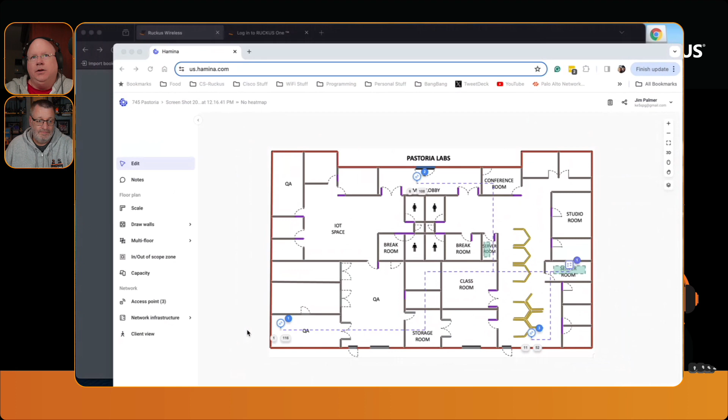And to clarify, it's less about being unwilling to use a certain measurement we think might be right. It's more about—you get a client or a customer or a project, you get a floor plan, but there's no measurements on it, no scale at the bottom corner, and nobody able to work with you at the local site. Amazingly, nobody has a tape measure or a ruler or any other way to say, hey, this office in the top left corner of the floor plan is an 8 by 10 office.

And that's really what it is. I've been doing this long enough, I'm sure you had the same—well, maybe not, because you came from a place where you were only working that facility. But we've all heard stories, we've all had experiences where you literally just get a floor plan with no numbers on it, nothing, and you're not local to that site, so it's hard to do the measurements. So what I will add is, in those instances, make sure to cover your own butt.

It goes back to garbage in, garbage out. If I have no measurements and nobody willing to give me one, take a yardstick, whatever, and just tell me point A to point B is 3 feet, or 10 feet, because that affects your margin of error. Unless you've got somebody do that, you put a caveat on that predictive design model saying this needs to be validated, because there were no hard measurements taken on site to confirm distances.

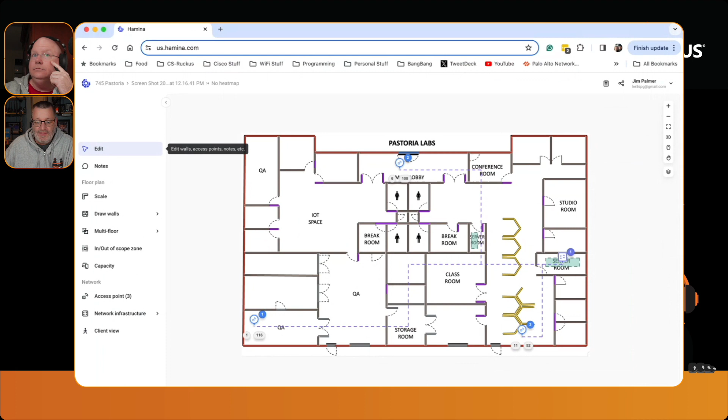Just as important, if not more important, than scale is the attenuation values. Going back to our planning tool, you can see different colors here - yellows, grays, browns, purples, red, silvers. Those are all different types of walls I've drawn in. I did this quickly to prove a point, so accuracy didn't matter here. When you do these crazy angles, it gets a little wonky if you don't zoom in close and take your time, so I was just kind of throwing them in.

It was more of a case of showing that when you do these crazy angles, it gets a little wonky if you don't zoom in really close and take your time.

More importantly, most design tools will have all these different material types - retail shelves, warehouse shelves, windows, tinted windows, wood. For the most part, you end up guessing at this, especially if you're not on site. However, you're not supposed to - this goes into that. This is actually much more critical.

Thanks, Christopher. Good old Simo - see, I told him he had to be on the show again. That doesn't count though, it doesn't count. So now we've unofficially had Simo and Sharon on.

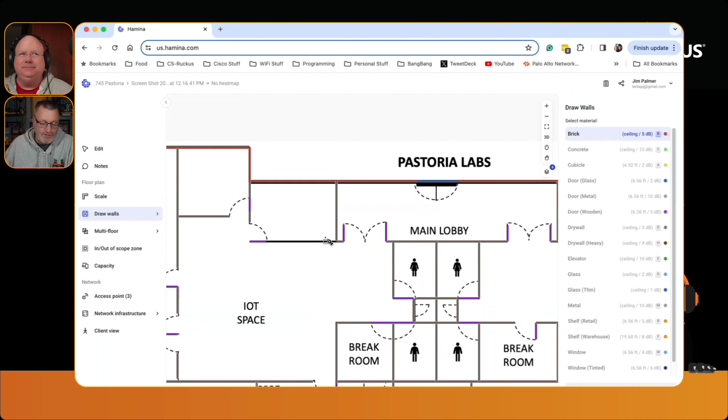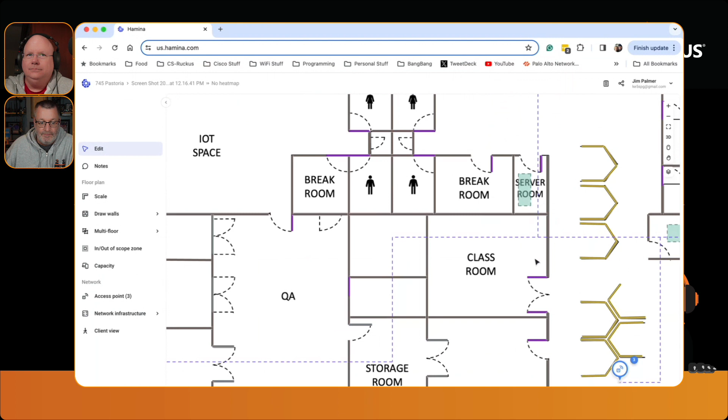There's actually ways you can go measure and find out exactly what the attenuation value of each one of these walls is, and don't guess. Too many times you find out this wall used to be an exterior wall, and it's actually brick that they just put sheetrock over top of. So now you have sheetrock, brick, and sheetrock, but you just draw it as sheetrock, and then it doesn't work, and you want to know why. Generally speaking, it's because for a design tool you probably put in the wrong attenuation values, whether that's for a wall or, in this particular tool, for these different server racks in server rooms.

You can actually draw in some attenuation for saying, hey, I have a server rack, and there happens to be a switch that's in this server rack. And so those things matter.

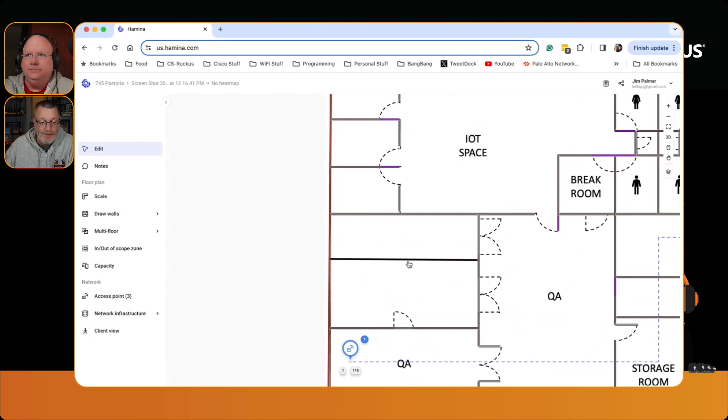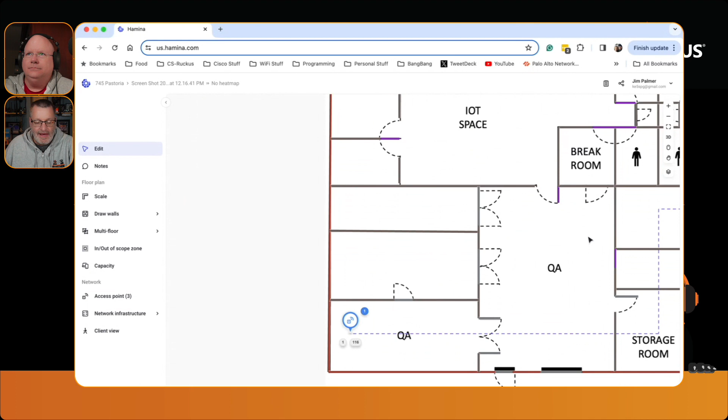Now, I can also tell you that somewhere over in this part of the building is some Faraday cages that they built, but I'm not sure where they are, so I can't put them in my drawing. So that means my tool is completely wrong. Now, I know that, and I'm allowed to do these things because I know there's values I'm missing. It kind of goes back to if you know that's what you're doing, if you know those are the rules you're breaking. I think Lee Badman did a presentation about it at WLPC, about breaking the rules. If you know why you're doing it, if you know what you're doing, then you are.

But the attenuation values are really critical. Same thing with the attenuation zones, like I was just showing. Too many times it's too hard to say, hey, I have a specific wall, or a window, a door. It's like, hey, you know what, I have an attenuation zone. You can actually draw that and measure it the same way. What's my signal on one side of that zone? What's my signal on the other side of that zone? You can draw that into the tool and say, you know, I know there's a wall with a bunch of metal filing cabinets. That would be an attenuation zone because it's not just one metal thing, it's a whole zone of stuff. So you can build in the zones, but it's all about making sure you know and understand these things, because quite honestly, putting APs on a map is the easiest part of the job.

You mentioned the attenuations. My favorite use of that, by the way, was warehouses. Yeah, it was one of those things where if you've never used an attenuation zone before, and if you've never done a warehouse, you're like, how do I model this? You've got all these random shelves, but the problem with those, getting way into the weeds, warehouse shelves, depending on what you're warehousing, can change.

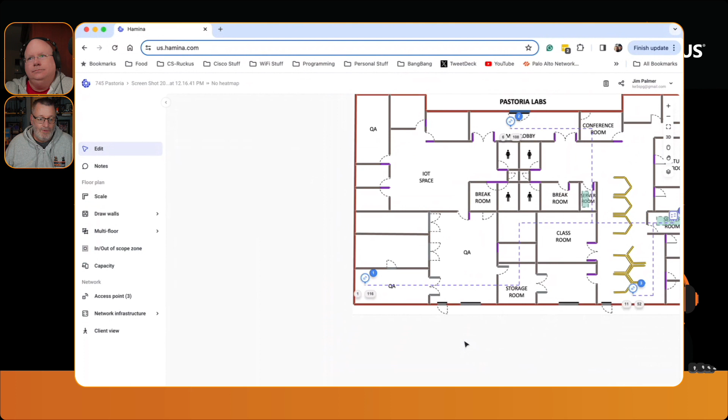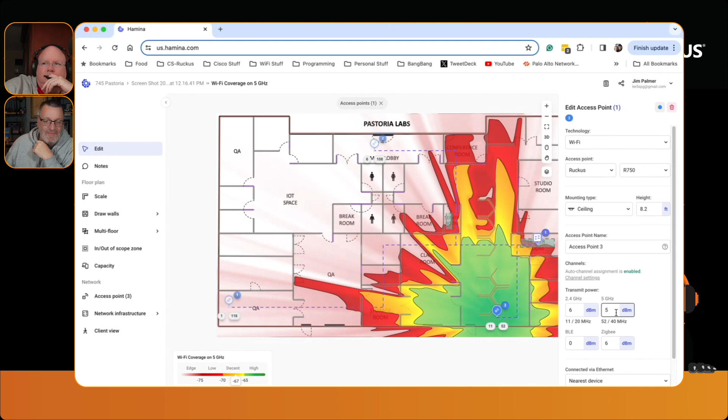But here's the thing, right? There's ways that this information can be gamed. One of the things I'm going to show you is on this particular AP down here, the transmit power was turned down to 5 dBm. So it's easy to be like, hey, what if we turn that thing up to 20 dBm? Oh, now look, now we're looking much better.

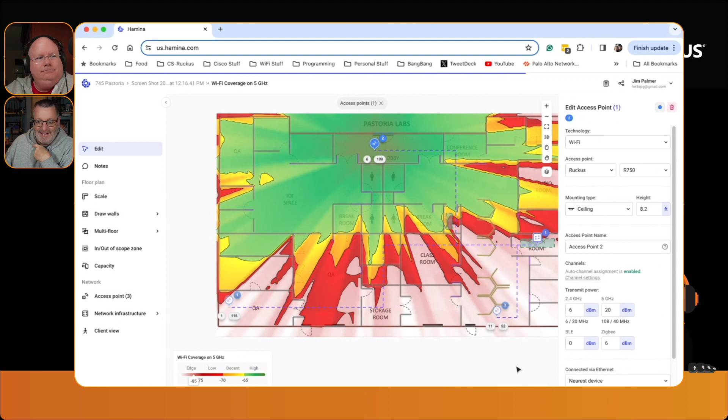So what if I come into this one and we're going to double that? We're going to go from 10 dBm to 20 dBm. Oh, look, that got way better. Now let's come down into this guy in the corner, and let's take it from 10, we're going to bump him up to 20 dBm. So now look at my heat map. Look how well I did at a design, right?

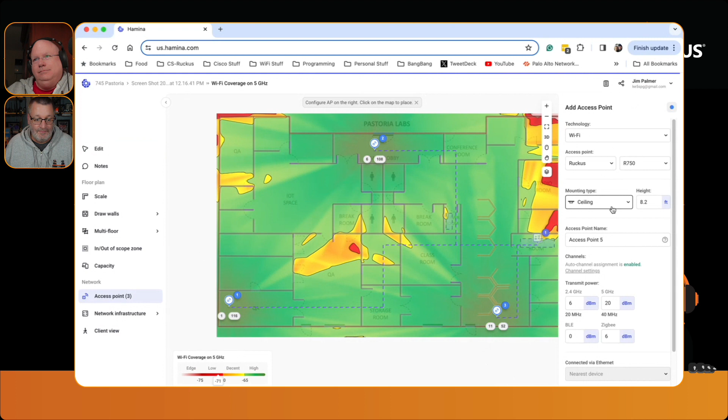Now, the other way you can do this is you're going to say, hey, let's add in some more APs. So let's put, look, we need an AP there, that'll fill in that hole. Let's put an AP over here. We need an AP over here. I think we need some more APs. Somewhere the Wi-Fi Hulk is getting angry.

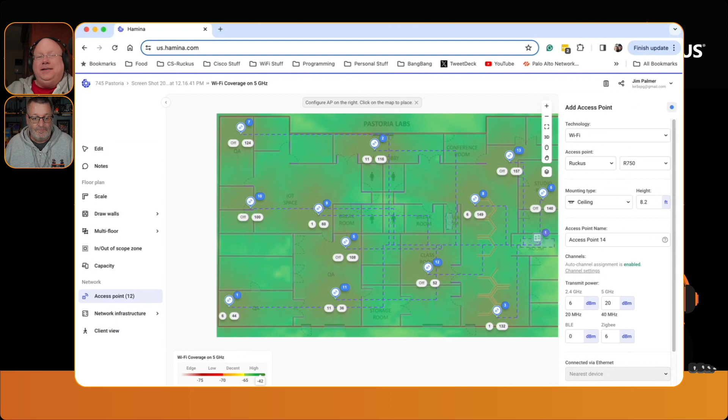Well, no, but it's all green, right? Look at this, it's precisely... look how well I'm doing. As somebody in sales, I love seeing this because it's great, and I'll happily sell you that many access points. But we don't want an AP out there. The CWNE in me is getting a little bit triggered.

Well, but if you look at it, right, we got this great coverage. We have all this great stuff, and we can come down and go, look at my secondary coverage. Yeah, it's just as good. I want to see the other stuff. So let's see, signal to noise. Look, I got no interference.

But what we're not seeing here, and I'm kind of picking on them, quite honestly, the reason why we're not going to see it is I think I set my channel widths too narrow. But if we were to go in and set these things and say, hey, we're going to run 160 megahertz wide channels.

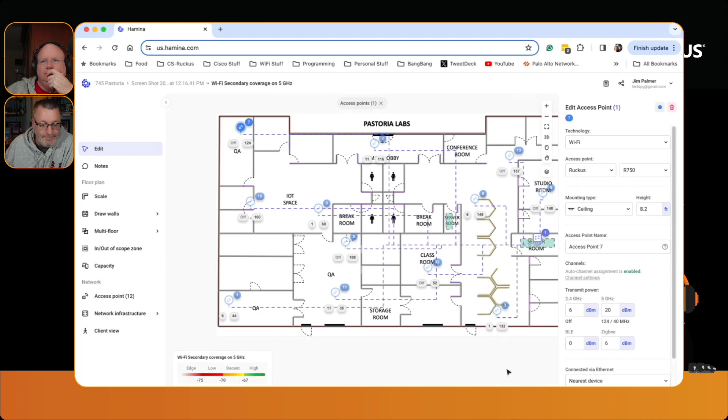Because let's see, transmit power... oh, let's take a look at the channels here. Oh no, let's go to Wi-Fi. Yeah, 40 megahertz, so let's put these at 160. Good God. Well, you look savage. I am.

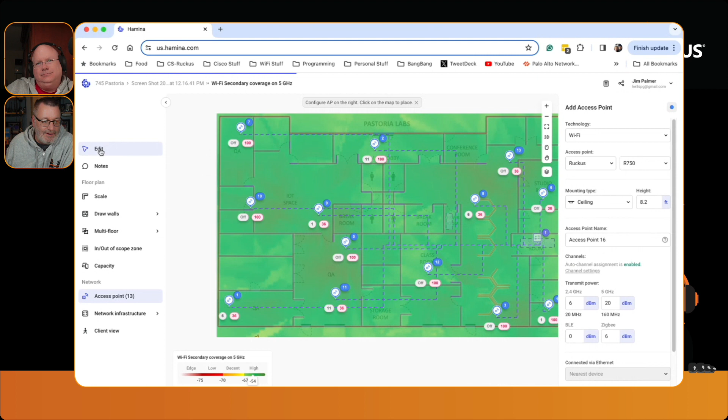So our secondary coverage is good. But this is the point I was trying to prove to everybody, right? Because I've seen this on social media, I've seen this on different messaging boards where it's like, oh, just get somebody to throw together some APs on a heat map. I see this all the time where people are like, oh, but my coverage is great. And they're like, oh look, I got a little hole down here, so we're just going to go ahead and drop an AP down in here because we're just going to get rid of that hole, right? So they're just like, it's like, hey, I can make any heat map look green. I can make it look really great. I can take my client in here and I can be like, hey, you know, I got a data rate of 1922 megabits per second.

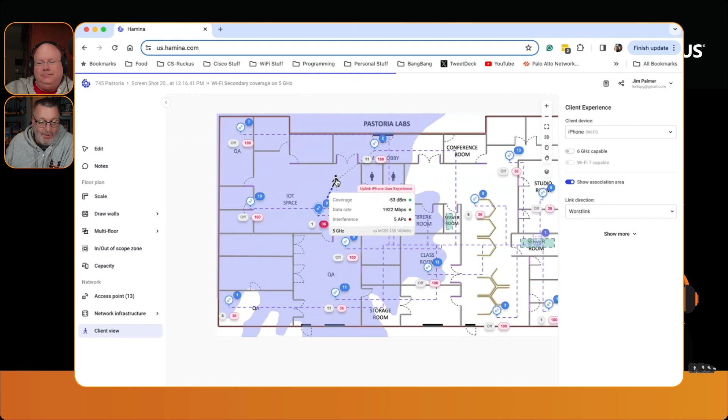Now I'm getting interference from 5 APs, and this tool will actually point that out and tell you, hey, this is not great, you should probably stop this. You can see, because I think I have all the power cranked up on these things, it's just a disaster, right? To anybody watching along, do not ever replicate this design in production, ever, unless you plan on having a really bad day.

Don't, because this is the whole point of my argument: I can make it look really green if we only take a look at one of the views. If I only look at coverage, data rates, I got great data rates. But when we take a look at the interference, we get this little pop-up down here going, you got a bunch of problems. I think interference is on this one, I think health was on the other survey tool I'm thinking of.

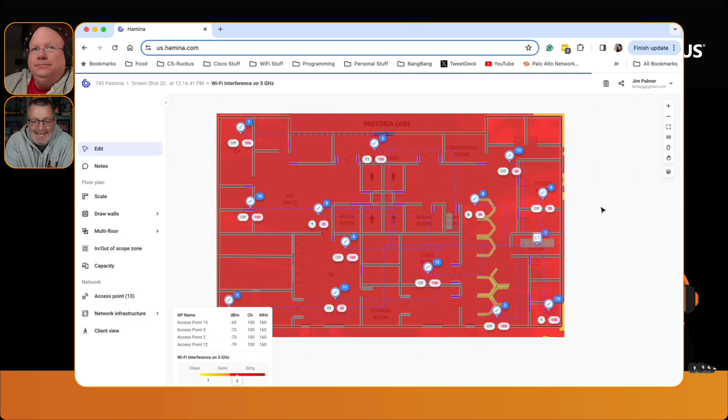So there's the tools, I always looked at that first, to be honest. That's what people forget, and this is why I'm doing this, why I took the time to go through all this live: I want people to know and understand that the actual coverage map, this one right here, I only glance at in passing.

Because the other way I could do it is if I were to make each one of these walls be like 40 dB of attenuation, then it would all work, and I could put an AP in every single room and it would work because I put bad data in. The tools are not bad, our use of the tools is bad.

So when you hear people talk about 'I'm going to do this design,' know and understand that there's ways to do it right, there's also a lot of ways to do it wrong, and there's ways to hide it. But if you know to look, if you know to say 'I want to look at stuff other than data rate or signal to noise,' any of those other things, you'll be okay.

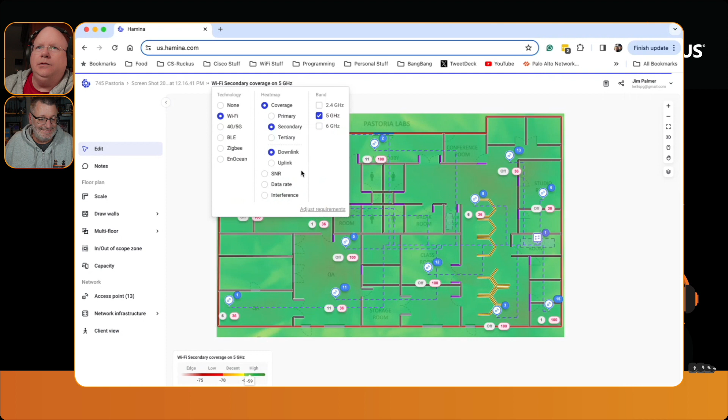I'm a big fan of the health view, again, it's not hard to make it look green. It's looking at something that shows you the interference and the health of the network. It's going to give you an idea of what the client experience is going to be like. Am I going to have a problem roaming? I love looking at the secondary and tertiary coverage if the design requirements from a prior episode call for those things to be of concern.

Some networks, some of your customers aren't going to care. I happen to have designed some of my networks to have tertiary coverage, so I cared. But it all, again, it depends.

And that's the thing, the tools are good, but you have to use them right and you have to know what you're doing. So when somebody's like, 'oh, I have a heat map,' I get frustrated because anybody can make a heat map look really good to sell something, but that's not what I want to focus on, because there's more to the tool than a coverage heat map. When you're doing a design, make sure that if you have access to these tools, you're using them right, because if you put garbage into the tool, you're going to get garbage out. There's no other way to do it.

And for anybody looking at this, wondering about your comment about making it all green, having heard this one too many times as an example from people - I'm going to pick on salespeople, but the uninformed, the non-Wi-Fi nerds out there who see the orange and the yellow and the red and the different gradients and go 'I want it all green.' They don't understand, and you have to be able to explain to them.

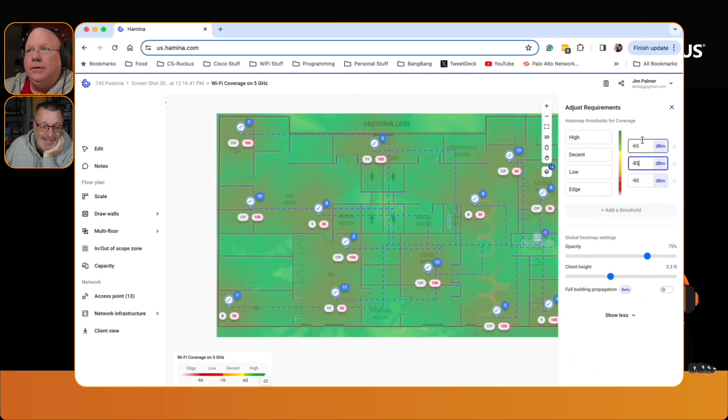But check the scales. Yeah, that's what we're showing you, we're doing live. This is so if you really wanted to make it good, you'd be like, oh, we're going to make that a neg 90, we're going to make this a neg 85, and then we're going to make this a neg 75.

Right, so now we've adjusted our scale to where now we can take out all kinds of APs and we're still going to have great, because well, our scale's wrong.

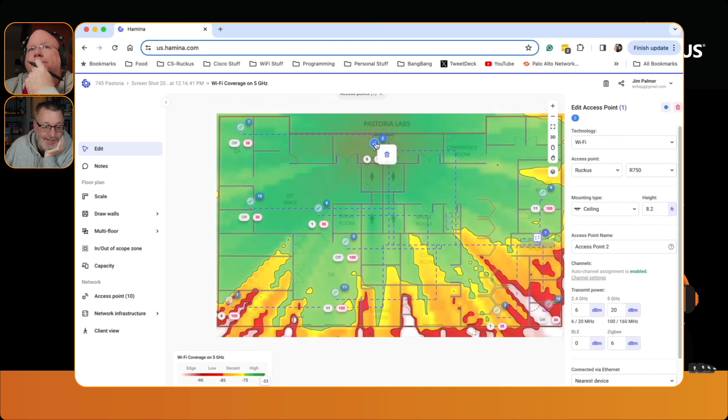Yeah, but it's one of those again where don't be afraid, it doesn't have to be all green. Just make sure you know what you're explaining. And if you've got somebody who is insistent on seeing all green on the map, don't add APs to make the map green. Just do what Jim did and change your key, if you will, so it has a little bit more green and less of the other colors. Because at the end of the day, you do need to have some differentiation between APs, otherwise your clients will be stuck all over the place.

So anyways, this actually goes back to my neighbor Bob. Sorry, Bob. Bob was worried because he had a neg 67, the horror. And I'm not even sure what this bottom number was supposed to be or what it was, I'll have to go back and look.

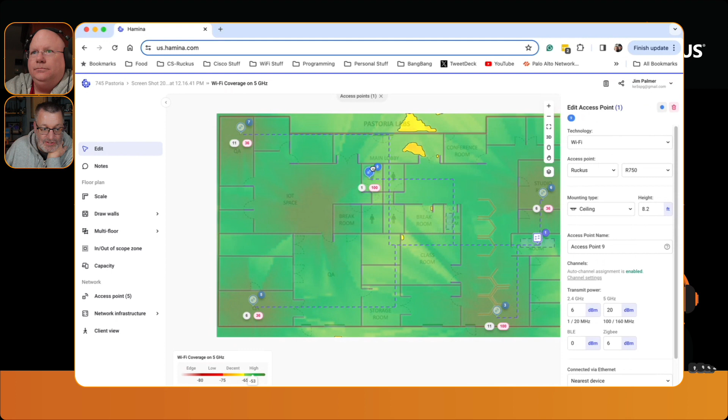But yeah, to John's point, you want to have these yellows. The yellows aren't bad, now the reds you don't want. But it's okay to have a green to yellow, it's okay to have some of those in there because at the end of the day, to John's point, that's what helps our clients roam. You want to have these different shades of green, you want to have that in there. And like I said, even some yellows aren't really bad. You look at this, this is my weakest signal, and it's a neg 68. Neg 68 still is very good.

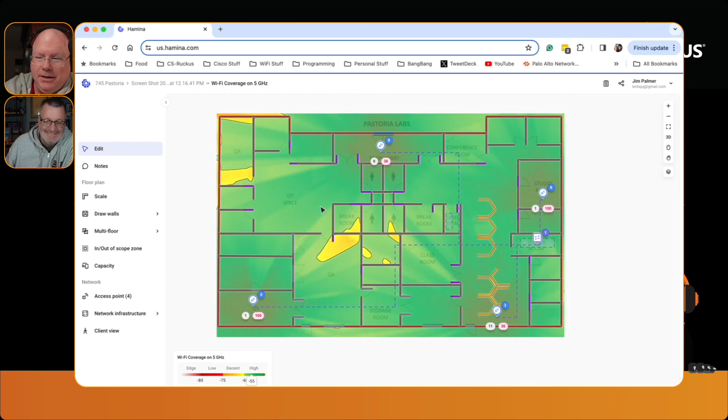And so these are the things that drive people like us nuts, is people that misuse the tool. They insist on all green, and then they want to know, they go, well, I had a heat map, why doesn't my network work? Well, now you know a little bit. There's more to a heat map than just a heat map.

Yeah, if you know and understand these things, you can be like, hey, at the end of the day, I have my design, I do a good design because I know and understand all these things. Then it gives you a much better chance, because nothing's going to ever happen without some type of weird anomaly going on. Nothing ever goes perfect, which is fine. And as long as you know that and you can work with it, then it's an easy thing to work around, and we can do it.

So I think that's about it. Our next episode, we're going to talk about a default or two or three, we've got some stories there. Oh, I'm not going to touch that one. Alrighty, I didn't think you would. Not yet, we'll save it for the next one. So let's go back so we don't have to see that. No, we'll save that for the next one.

And that is all I have, Mr. Palmer. That was good, I like getting back into it. And again, we've said this all the time, it could be almost like a tagline, I could actually have it set up on the soundboard, just hit the button. But this is an episode, and we could do a whole series just on design conversations.

This is just the tip of the iceberg. If you're really curious about it, let us know, maybe we'll do another design series, or bring somebody on to talk about some design horror stories, if you will. And as Jim said, there's a couple, 2-3 classes that I can think of off the top of my head that are maybe by a tools vendor and or by CWNP that cover design pretty well. So there's definitely materials out there, we can certainly point you in those directions as well.